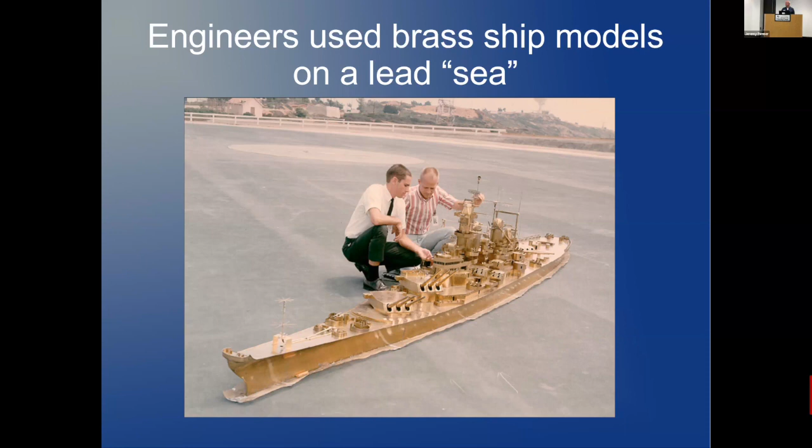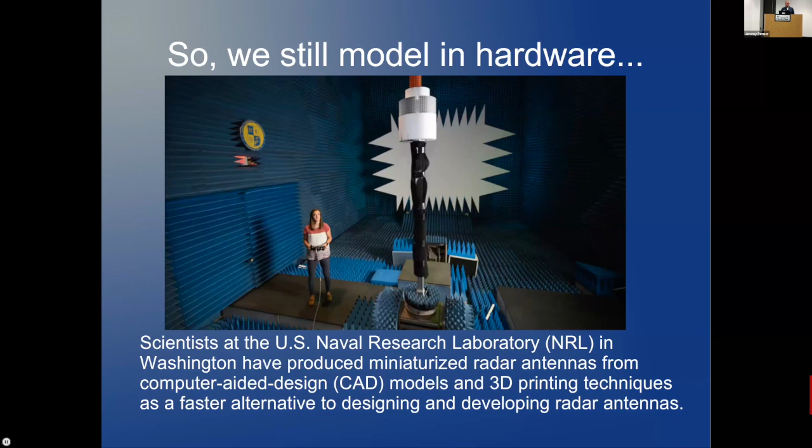Okay, so we're thrifty ham operators, so we don't do that approach. What do we do instead? Well, one thing I want to point you to is software. We're not going to model antennas in hardware, we're going to do it in a software antenna model. And we're going to use one of the available packages. This one is called MMANA-GAL.

Right off the top, let's get that silly name out of the way. Why is it called MMANA-GAL? Well, AN is for antenna, and the second A is for analyzer—so MM-antenna-analyzer. The first MM refers to Makoto Mori, who is Juliet Echo 3 Hotel Tango. He's a ham, and as you'll see, all of these people are hams—so it was an implementation by amateur operators. The G from GAL is for Igor Gontarchenko, DL2KQ—I believe that's German. And the AL is for Alex Schevelev, DL1PBD. Again, three hams got together and came up with this MMANA-GAL software.

The one I'm going to show you today is freely available, so you can download it without spending a nickel. If you want to contribute to the programming effort of these folks, you can get the MMANA-GAL Pro version for $99, and you'll be at peace with the universe. Or you can use EZNEC Pro 7—used to be quite a few dollars, now it's free. If you find EZNEC useful, please by all means go ahead with it. I found that MMANA-GAL was just simpler.

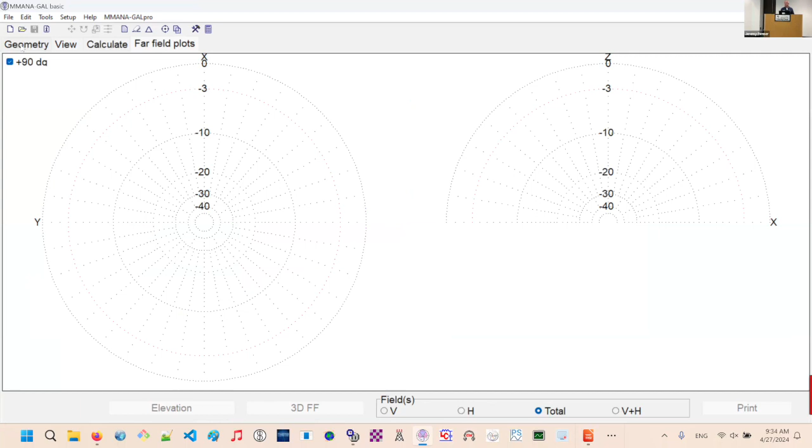Okay, so enough talk, this is MMANA-GAL. When you launch the program, this is the GUI, the graphical user interface that comes up. There are 4 tabs: geometry, view, calculate, and far field plots. You start on the left with geometry.

So we're going to go ahead and call this 20-meter vertical, just to keep our modeling terminology straight. This file or exercise is going to be 20-meter vertical. For frequency, we can select different ones, but let's start with the 20-meter band at 14150 specifically.

First thing you do is highlight X1. This is like an Excel spreadsheet, so you just hit enter and you get X1, Y1, Z1 - the first point with subscript 1. Then you get a second point, X2, Y2, Z2. We're going to put 5.1 meters here, and remember that was the Z displacement. So Z2 is equal to 5.1 meters.

Enter. So, is Y2, Z2 related to R2D2? R2D2 was our cousin, yes indeed. C3PO is the next level. Thank you for that, there's always one in the crowd.

Okay, so we want to use the view tab next to make sure we actually put something right - in other words, that we didn't put something diagonal, which sometimes happens. You can use the shift key and scroll down to move this thing around. Of course it's a very boring design, so there's not much insight to get from this, but this acts as quality control to confirm you're actually modeling a wire going straight up and down. You can hold the mouse and knock yourself out, moving the shape around.

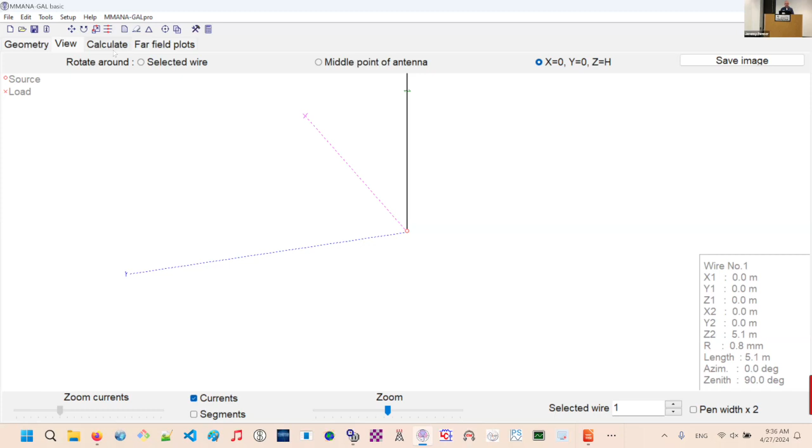So next we go to calculate, we're done with the view. Now we double check that the frequency is 14.15. Next, ground - we need to tell the program what ground we want to use.

Free space? No, that's for the space station - if we're going to put this up in the space station, that's what we use. Perfect ground is if you have a perfectly conducting ground, which, in parentheses, it should be noted that if you're on salt water on Galveston Bay, in the middle of the bay without any metal substructures around you, you might want to model it as perfect. But for here, we're going to go with real. So next we click on ground setup.

Here we have two parameters of interest: dielectric constant and conductivity of the ground. It's defaulting to basic average ground. It's not going to be desert like outside El Paso or San Angelo, very dry, and it's not going to be very conductive like if you're setting this antenna right next to the ocean with salt water.

Height is how high off the ground you want to put that feed. In this case, remember, our approach was to put it on the ground itself. The little red circle is on the ground, so we don't want this displaced off of the ground. We want it at 0.

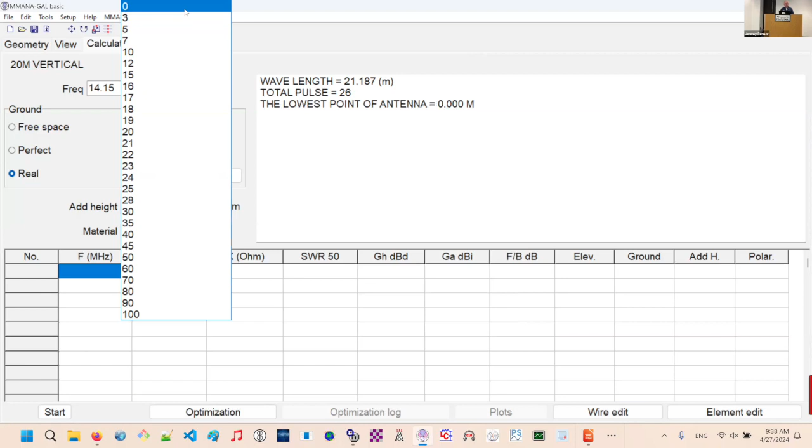Material: what is your antenna made of? You have different choices here. We're going to just select copper wire, a basic copper wire antenna. And that's all we need to tell the program.

As soon as we click start, the program will run, and just be aware this can take a long time since you're asking the computer to solve very complicated differential equations. So we click start, and it's done. The power of computing today—you can design a nuclear bomb with these things. It's amazing, it's that fast, and it just simulated all your equations for you.

So what does this tell me? I'd like to point out two parameters here. The input impedance of my antenna is 35 ohms. We'd like it to be 50 ohms, but 35 is not too bad. And my SWR, assuming a 50 ohm impedance, is 1.45. Not too bad.

So now with that, we go to far field plots, and here you see two plots. Remember from your technician exam, you may have looked at the azimuthal plot, which is a view as if a bird was overflying your antenna. Your antenna is at the origin, x equals 0, y equals 0. The bird flying over sees essentially a big blob down at the bottom. Now on the right-hand side you have the elevation plot.

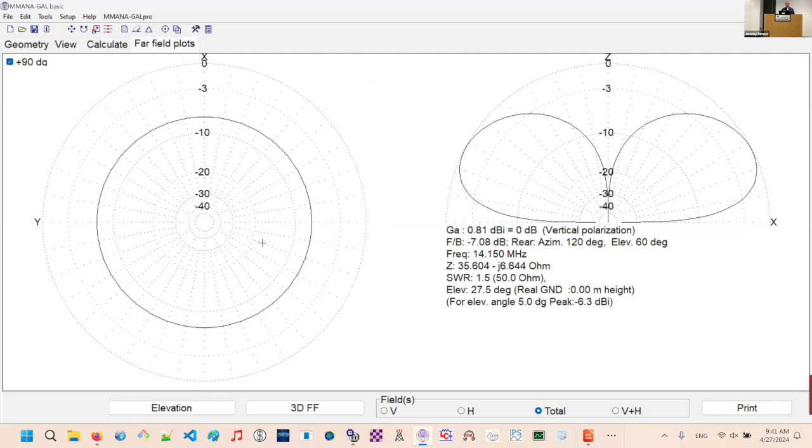So we can click, for example, elevation and say 5 degrees, say okay, and that's the profile at 5 degrees—the gains you'd expect to get at 5 degrees. This would be for your DX right here. So great, that's fine.

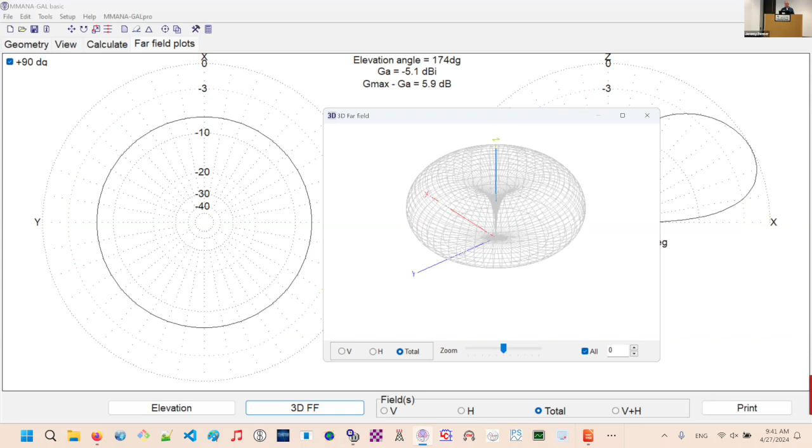But I'm really more of a visual person. Can you model this in 3 dimensions? Well, you can—use this button called 3D far field, and you end up with this donut plot that we'd expect from a vertical antenna. You hold the mouse down and can knock yourself out doing this kind of fun activity all afternoon long. So we'll leave that one alone. And that is the modeling of a vertical antenna.

As simple as that. So we're not going to save it—we're going to move on.

Next, we're going to go to the practical exercise number 2, modeling a 20-meter dipole antenna. Now, a dipole antenna, if you remember, dipole meaning 2, it's going to be extending from your feed point to one side and from your feed point to the other side symmetrically.

And we're going to hoist this device up a certain height. Our exercise here is, again, I point out the ground plane, it's the line with the hash on the very bottom there, and the red line right here is my antenna. It's going to be a displacement in the X direction of 5.1 meters. Why 5.1? Because it's a quarter wave for the 20-meter band that we want to work with. On the other side of your feed point, your red circle, just like before, is going to be another 5.1 meters.

We're going to then take this dipole antenna and displace it in the up and down direction, your delta Z is going to be 10 meters, and that is going to be 32 feet. Something in parentheses we should say, we're talking meters quite a bit here because MMANA-GAL works in meters, so you'll have to convert your measurements to meters.

Let me explain. Let's go back to MMANA-GAL again with this in mind, which is what we're going to model. And we're here, remember our 4 tabs, so we go to geometry, always start on the left. We're going to go ahead and put in, remember what we did, 20-meter dipole, the title of our exercise.

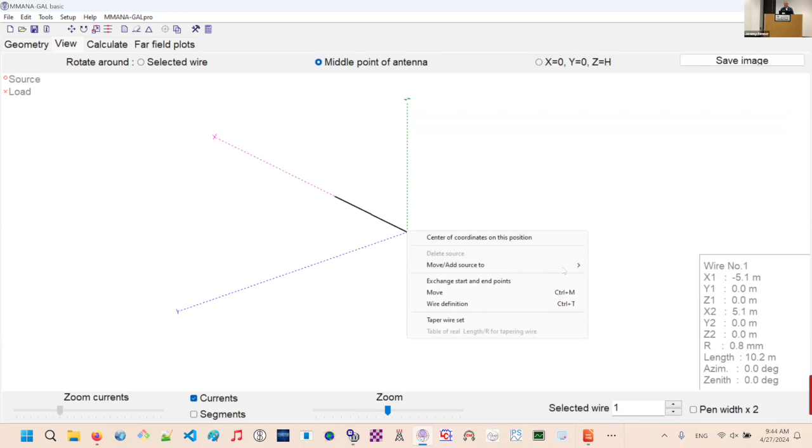Now, as always, we go to view to do the quality control to see if it did what we told it to. It did exactly what we told it, not a very interesting antenna, a piece of wire resting on the ground. We hover in the middle, right click, and just like before, we add a source to the center of the wire. As soon as we click that, we notice that the program has added a little circle, a red circle, which the legend up on the left-hand side says, hey, that's your source.

So your source is in the middle. Something in passing, if we go back to geometry, remember we added something here on the top part, but notice the program has added something down here. That's the driving source that we're telling it to put in, so it's wire 1 center. So we don't have to remember that, we just do it interactively in view.

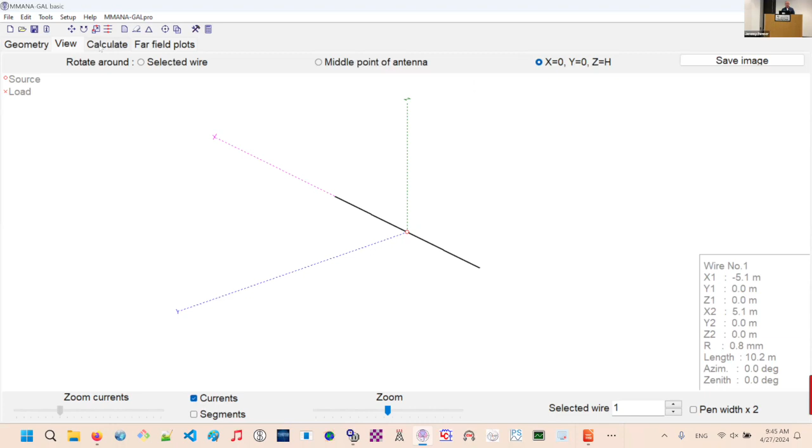So after that, we go to calculate, and again we check out that the frequency is at 14.15, which it is. The ground setup, we unclick radials because we're modeling a dipole, we don't care about radials. We leave everything default, we say okay.

The height. Now, remember in the vertical, we had the vertical feed point on the ground. Here, that's not going to be, we're going to have to have 32.8 feet of height, so that translates to 10 meters, so we'll go ahead and say 10 meters. And for material, we're again going to go with copper wire. So again, that's all we tell the program.

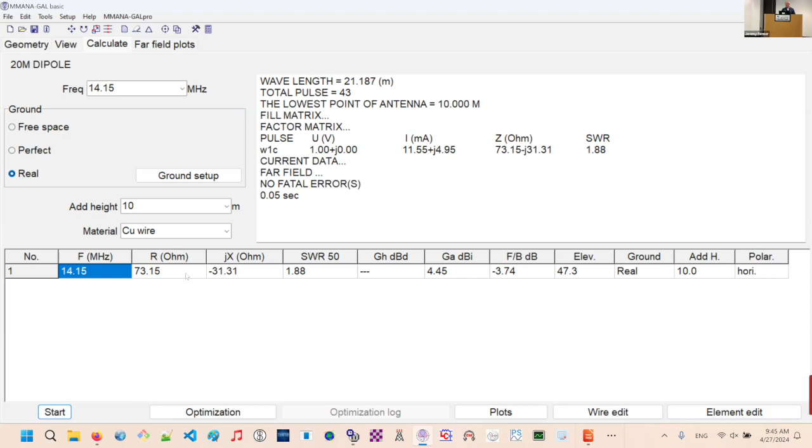Now we tell it to start and we brace for the long calculation, and you're done. So there we are. Now we're getting, again, the 2 parameters that we care about, our input impedance. Ideally, we'd like to have it at 50. It's saying 73, could be worse. Our SWR, 1.88, not too bad. So we'll leave it at that.

And then we go to far field plots. We see now that the donut shape has sort of been squished on the sides there, and that's because this is a dipole antenna, so the dipole is going to have a different radiation pattern. Again, this is the left-hand side, the azimuthal view, it's as if the bird was flying over our antenna. Remember, our antenna was in the minus X and plus X direction along the X-axis.

So along the X-axis, which is up and down in this view, the radiation pattern is going to be squished. Along the Y-axis, it's going to be elongated. So that's a typical dipole radiation pattern, and we get a little bit of this sort of pattern right here.

This is giving us insight about what would work for DX and what would work for what we call cloud burning. Cloud burning refers to when our antenna is aiming directly up into the clouds, hits them, and bounces right close to us. So say we want to contact Beaumont, you want a cloud burn, which goes straight up and straight down. NVIS.

Does anybody know what NVIS stands for? The guy in the blue over there, I'm putting you on the spot. Near vertical... yeah, you can't ask for that. That was not rehearsed and then we nailed it. So, near vertical incidence something.

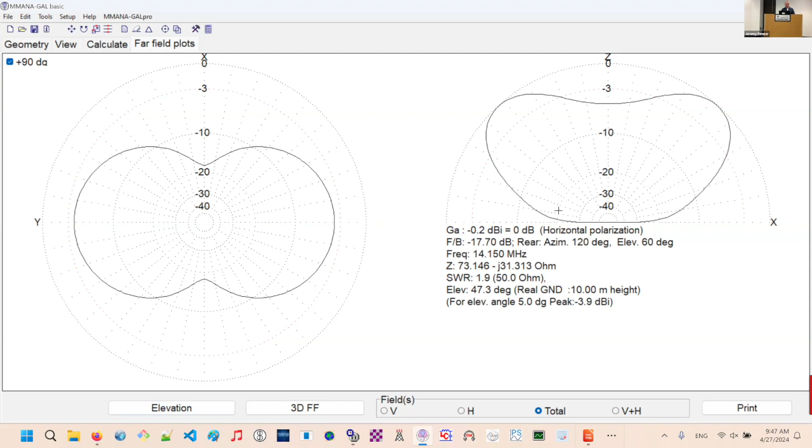Well, the question is, how is it going to work for DX? Remember the 5-degree rule, we put in elevation, 5 degrees, and we get that. So it works, but it's not so great. Now with dipoles, I believe if you go a bit higher in elevation, if you hoist the antenna up higher, you may get a sweet spot and get a better result. But this is what this is.

One last thing before we exit—by the way, with this you've already modeled two antennas because we're done with modeling the dipole. One thing to notice is that the radiation patterns are going to vary depending on which band you're on. If we change the band, and we'll see that in the next antenna, that does happen. So we'll go ahead and close this one.

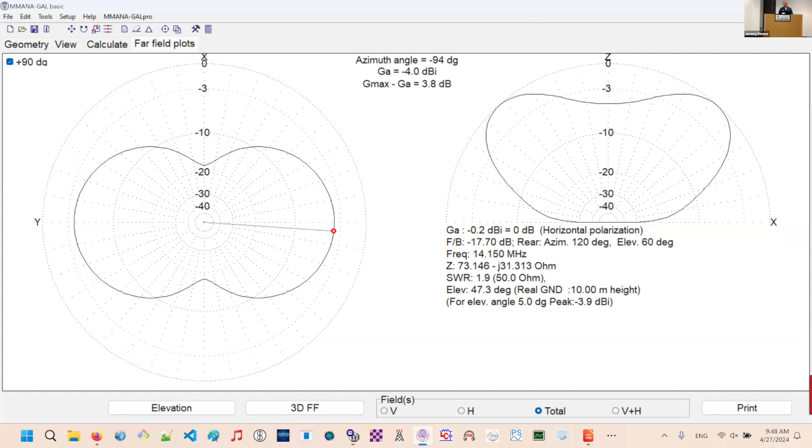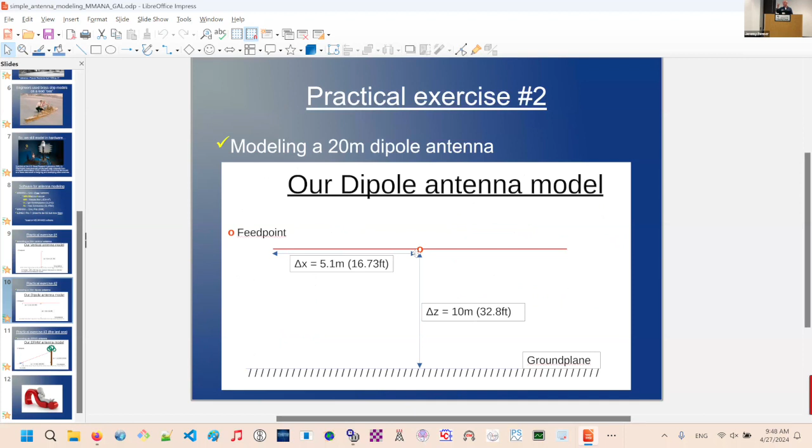Can you show 3D on that one? I just closed it—I'll show you the next one. Sorry about that, it was too quick. But that's a valid question.

Okay, now we're going to go to the advanced exercise. This is the last one, promise. This is going to be an end-fed half-wave antenna. So say for example you're going to Parks on the Air—this is my artistic rendering of a tree in Stephen F. Austin State Park, and you can hoist an antenna up to 30 feet or so. Your end-fed half-wave has a 49-to-1 transformer, that's the little light blue box on the left-hand side. The feed point is the little red circle right at the transformer.

Steve asks, what's this red line sticking out back here? That's what we call the pigtail or the counterpoise of an end-fed half-wave. You'll see online questions about whether a counterpoise for an end-fed half-wave is really needed—hopefully that will be answered in this exercise.

Again, just a note about the diagram here: the hashed line at the very bottom represents your ground. And that again is my artistic rendering of a tree at Stephen F. Austin. So there we go.

So the measurements we're going to have: we're always told that the end-fed half-wave should be about 67 feet long. Remember from algebra 2, the hypotenuse of this right angle triangle is going to be 67 feet long. That's your red line right here—that's your driven element.

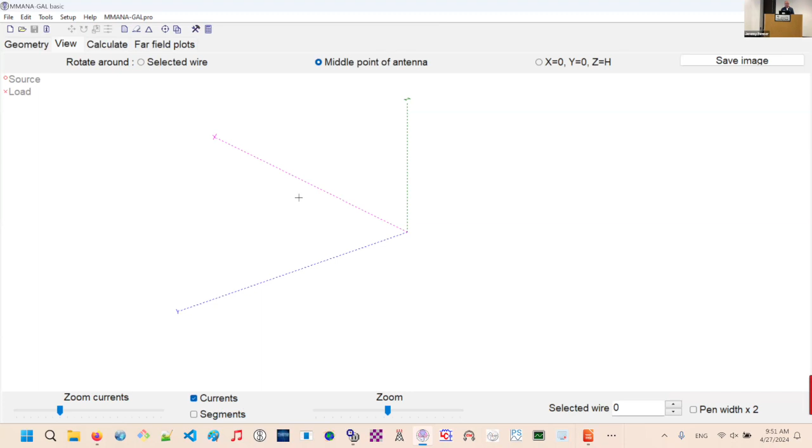Again, remember your four tabs: geometry, view, calculate, far fields. Start in geometry. Name it end-fed half-wave antenna.

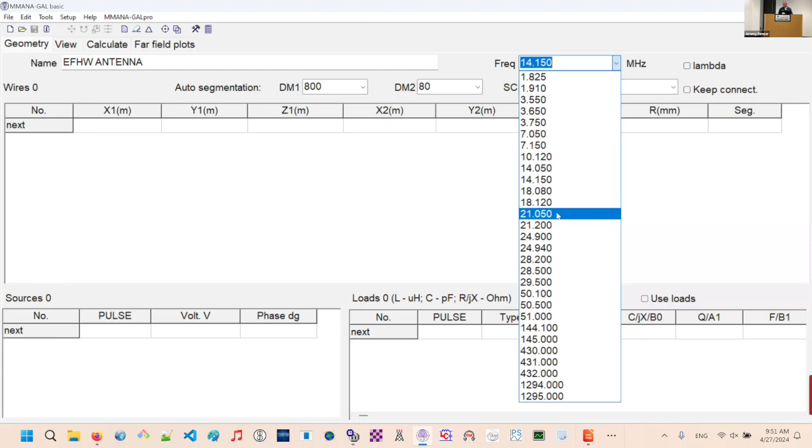We're going to model it for 14150. Matter of fact, where we found that online, it actually said this was going to be for a 15-meter resonant sweet spot. They said this thing is going to resonate in various frequencies, but definitely for 15 meters. So we'll go to 21050. We're going to do the modeling for a CW 15-meter antenna.

As before, hit enter right there. Remember, X1, Y1, Z1, we leave at 0. That's our origin. X2, let's go back to our diagram, was 17.68 meters. If you look at the very bottom there, between the tree and our feed point, 17.68. So we'll go ahead and put in here 17.68 meters. And then for your up and down, up the tree there, 33 feet, which translates to 10.218 meters.

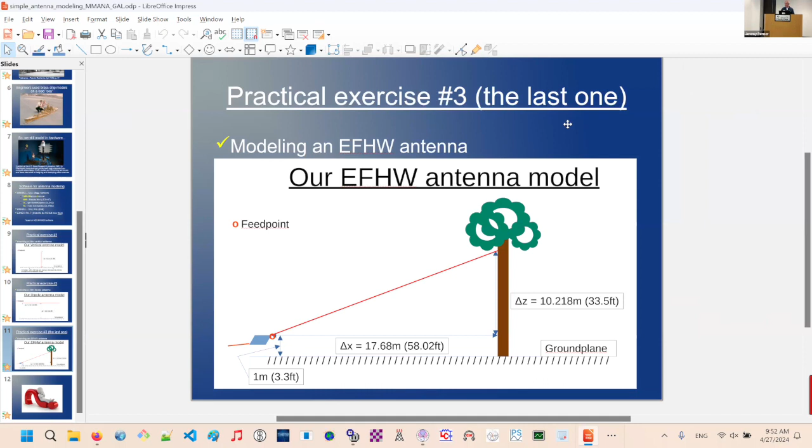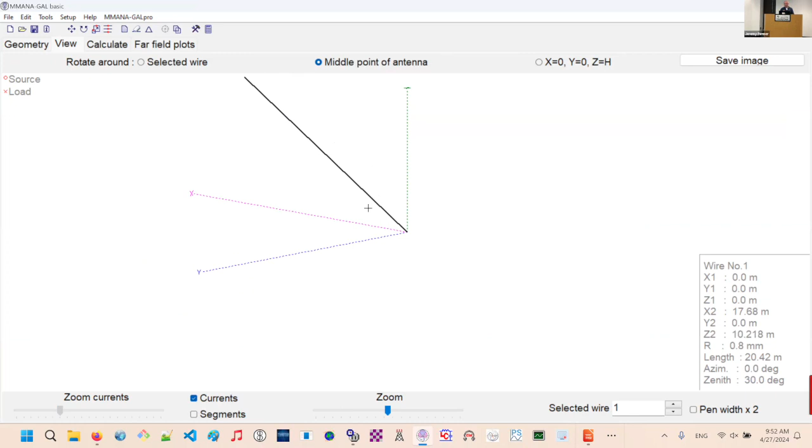Okay, so we'll put in 10.218 meters. Return. Next we go to view, and we see that what we thought we put up, we did put up. It's on the XZ plane back there, just a wire like that. Remember, our driven element, our feed point is going to be right here. So we right click, put our mouse on the very bottom there, and say move or add the source to the beginning of the wire. And again, we see the little red circle down there. That's our feed point. Refer to your legend in the upper left-hand corner. That's your source. Perfect.

Now we go to calculate. We double check the frequency, 21.05, spot on. Real ground, we don't have any radials. We're just going to have a counterpoise or something, maybe. We're trying right now, modeling without a counterpoise. We'll see how that works. So no radials, average ground, height above the ground. We don't want it at 10 meters. We want it the smallest one, 1 meter. So we'll go ahead and change it down to 1 meter.

And the material is going to be this copper wire that Anthony Morone has got for us. It's a green copper wire, 67 feet. He actually did that for our field day exercise last year, and it was a success. Very good results for people that built that antenna. 67 feet of copper wire. Great. So now we say start.

Okay, this is when you start saying, I don't believe in math. This is terrible because my SWR is 27,802. Calm down. What are we telling the computer to do? We're telling it to see an SWR of 50. But remember, we have a 49-to-1 transformer. Now if somebody can take a calculator and multiply 49 times 50 -- anywhere, we can bring a calculator up here -- but if somebody can beat me to it, 49 times 50, what number do you get? 2450.

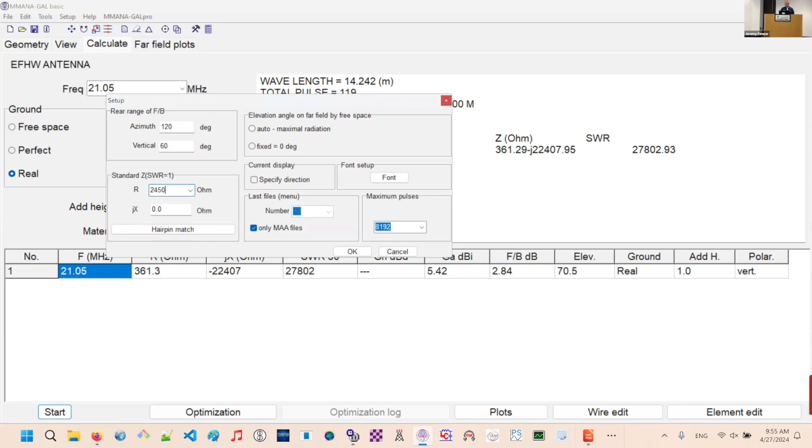Okay, now we're breathing again, but it's still pretty lousy. We went from 27,000 now down to 574, which is 1 to 574. That's not good, right? It's about 10 times. Yeah, it pretty much stinks. So we don't want that, right? So before we go into far field, let's improve our modeling a little bit.

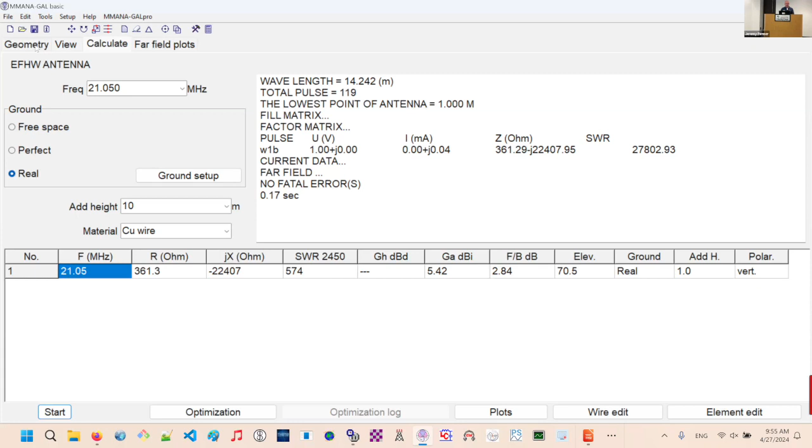So one thing we can do is add that second item we were talking about, that counterpoise. Remember, we're going to have a coax going back to our radio. So that's going to be our counterpoise. Let's go ahead and model that wire. We go to the next line, hit enter, and say the origin is at 0, 0, 0. But X2, remember from here, you've got your 49-to-1 transformer, 67 foot into that tree. This way, you're going to have 10 foot of wire as your counterpoise. So let's call that -3.

Why -3? -3 meaning 3 times 3 is about 9, so yeah, about 10 feet, something like that. So now let's go back to view, see if it did exactly what we told it to. It seems to have done exactly what we told it to. Again, view we use as a quality control of what we just told the program to draw. Click on calculate, and now we say start.

Well, that's a heck of a lot better. So just adding a counterpoise of about 10 feet, this is rule of thumb. I mean, we haven't done any calculations. We came up with this right here.

Okay, 2.92, could be worse. But now I'm going to show you something interesting, and hopefully this is worth the price of admission to this talk. There's this button over here called optimization. Optimization will actually do tweaks to your geometry to go ahead and optimize mathematically the parameters that you want to improve something for your intent.

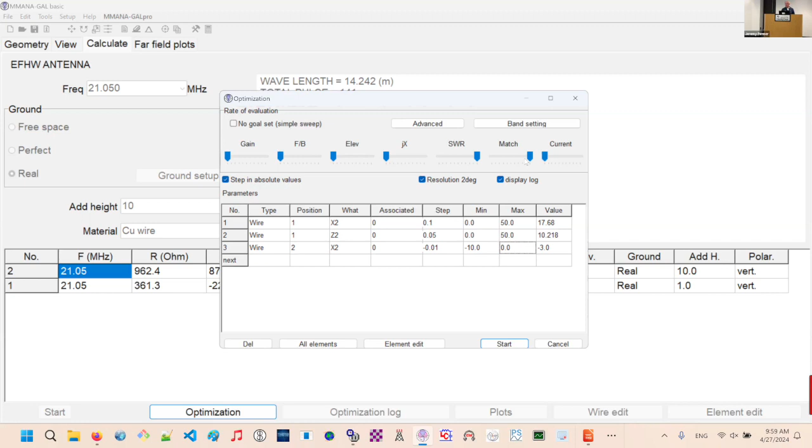So this is the advanced part of the modeling, okay? You're telling it what you can optimize and what do you care to optimize for. You click start, and now the program is actually doing some crunching for it. He's actually changing these values, and he's going ahead and coming up with something.

So he's optimized your antenna and giving you a resistance of 2087. Remember, we wanted that to be 2450. It's a lot closer. And your SWR is now 1.5. Something you can live with.

If you go back to geometry, it's gone ahead and changed your values. Remember, we had 17.68. Now the program is saying, hey, you probably want to have that delta X as 18 meters. And here's delta Z is fine at 10.218. And that counterpoise, you said it was going to be -3 meters. You might want to have it at -4.

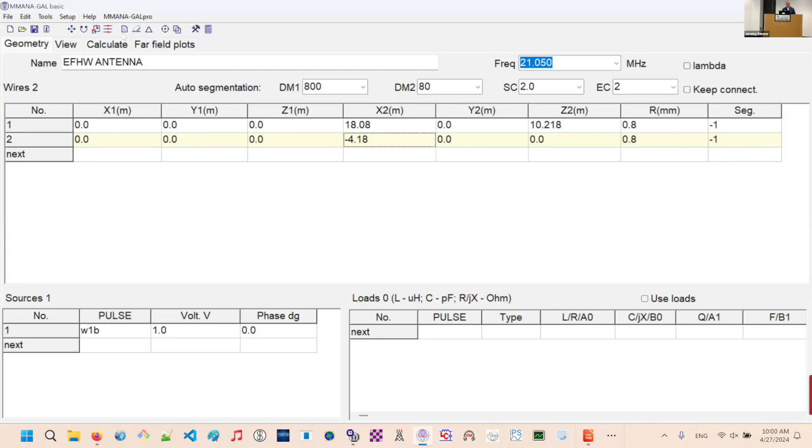So this is the insight that you get from computer model. It's not telling you exactly what to do, but it's telling you, hey, you might want to do this 67 foot a different direction, a different dimension, and also for your counterpoise. You might want to have it longer. So that's what we're getting.

Now you can play this game more and more. You can tell it to optimize or tweak some more values, but we're going to call it at 1.51. So now we say start, because so far we just ran the optimization. By clicking start, you're actually writing it to the database there.

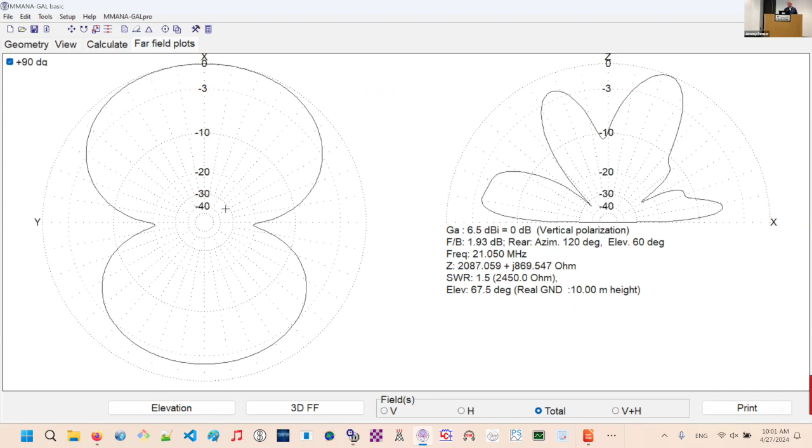And then from there, we go to far field plots. Now we get this. So at this point, it's quite different than what we were seeing before. If we go to 3D far field, you get a bit more of a complicated pattern.

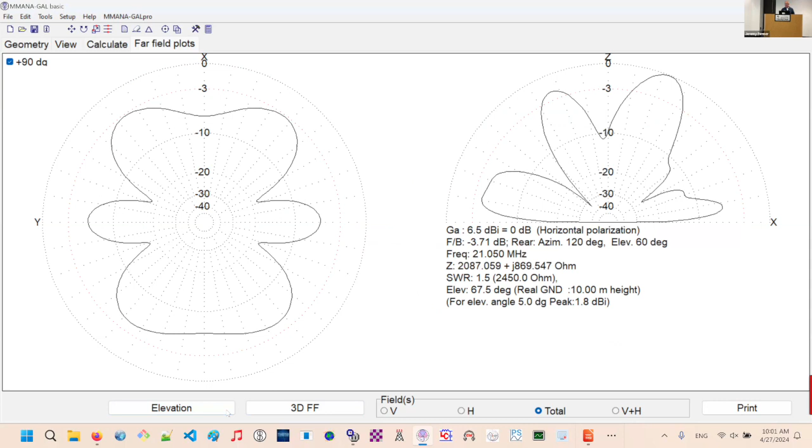At that point, you're seeing that you're going to have DX. Remember the 5-degree rule. So we put elevation at 5 degrees, and at this point I get the most gain, which is quite good. There's a null right there, and another good point right there. The DX over here at 5 degrees is showing it's not bad in that direction. So in this direction here is where I'm finding the best DX. It's telling you which direction gives you the best DX.

Since you're modeling this, did you pick a north direction? At this point we haven't told it - it's all relative to X and Y. So if you want to align your X and Y with northeast or northwest, you can do that. Then you can say, okay, my backyard has this orientation. It's just telling you relative to whatever you define as your X, Y, or Z direction. So at the park, what's your preferred direction?

Anywhere I can throw it up in a tree, because it's ground up. At some points when you're in the field, you can get a compass out and get the radiating element up in a tree. I've got it east and west - mainly east side. There's more amateur radio operators on the east side of the states. You do get some over the mountains in California, but it's pretty fun.

So let's just take a step back and see what we've actually done just now. We've modeled the vertical in 4 steps - 1, 2, 3, 4, hopefully that came across. We've modeled a dipole in 4 steps: geometry, view, calculate, far field. And we've modeled a pretty hairy antenna, pretty difficult, called an end-fed half-wave, in a few steps in which we actually had to use the optimization engine of this program.

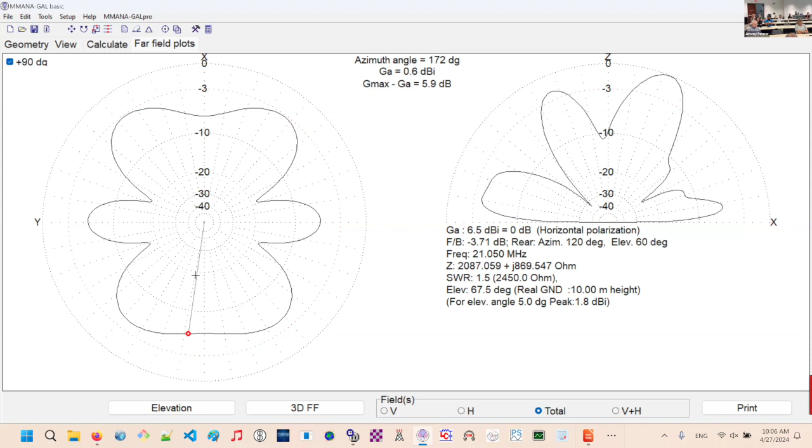I had another question about your grounding situation with the program. If you were able to get the ground parameters, what was that, conductivity and dielectric? Yeah, you're able to input them in there. Will it change the model as well? Absolutely, absolutely, that's a very good question Anthony's bringing.

That was actually the topic of a BVARC newsletter article I wrote two months back, about the effect of salt water. You keep hearing guys say, hey, I went to the beach and I was able to DX all with 5 watts, no problem. Mike, another colleague, said he went to Bolivar near Galveston, and with 5 watts he was able to reach Grenada, close to Trinidad and Tobago, because of the salt water.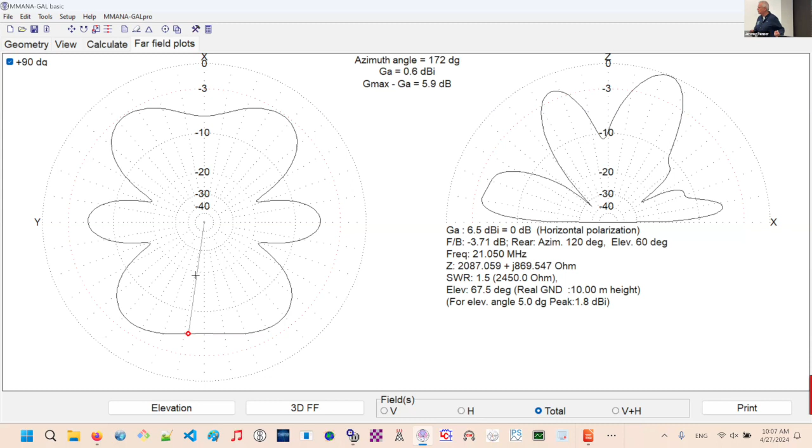So that got me thinking, can we model salt water? Let me show you in this area and calculate. When we went to the ground setup, we didn't delve too much into these two parameters: the dielectric constant and the millisiemens per meter, the conductivity of the ground. If you go into the ARRL antenna book, you'll notice that for salt water, that conductivity goes to 5,000. It's 5 for average ground.

It's about 500 for freshwater. So if you're close to Lake Conroe or up by Huntsville State Park where there's a lake, you can actually model the effect of the freshwater, which is better than average ground. You go to West Texas, you have to drop that number down to 1.0 because the conductivity is pretty lousy in very dry areas. So you can model these things and have a lot of fun giving you insight, proving or disproving, according to theory, what you've heard about.

Is there any advantage to making a dipole for 6 meters or 10 meters rotatable? Yes, there is, because we'd have to go to the model at that particular band, but it is somewhat directional. The dipole is somewhat directional, so essentially the way you orient it does make a difference.

Remember, it sort of looked like an 8, right? So imagine where the 8 goes by the center, that's a null. If you remember from our technician exam, that was the null, so in that direction you're not going to get anything. But you go 90 degrees off, and you're going to have one of the big lobes of that number 8. You're going to be pretty good in that direction and pretty good in the other.

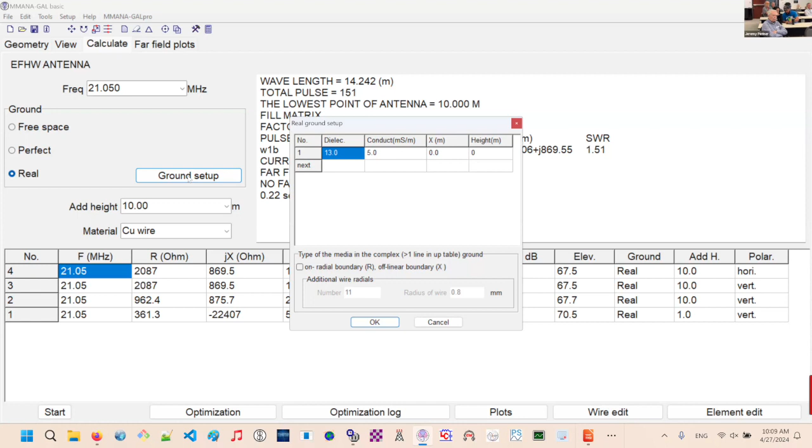Say you move, and over here and over here you're getting, I don't know, Georgia and California. You don't want to talk to the Georgians or Californians, you want to talk to the Northeasterners. Well, if you can rotate or string up your dipole this way, then you could get Tijuana and New York. So the dipole was that directional. It looked like there was a little bit of a node on each side, but not much.

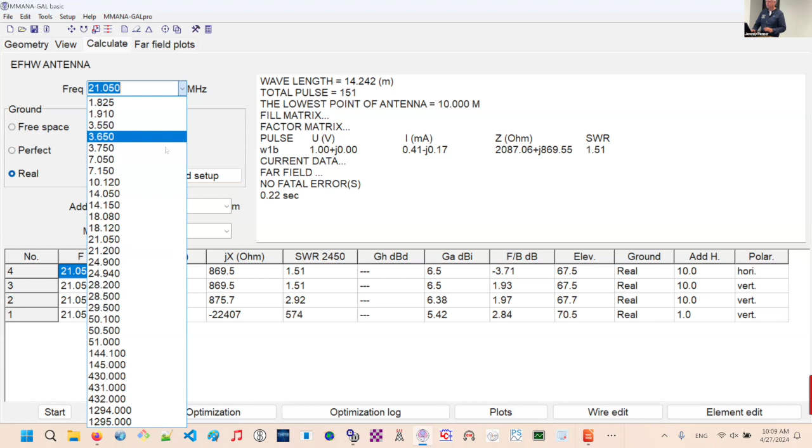One thing to note about these things, let's go over here quick and hopefully I can show you. Say, for example, we just went through the end-fed half-wave, but this is going to have a bearing on that question. If you changed the band, say we go to 20 meters, and we click start, nothing else has changed, nothing up the sleeves.

We click that, 1.12. So this is telling us, according to our model, remember the two parameters we look at after the computation: resistance 2668, we want it to be 2450, so that's pretty darn close for a 49-to-1 transformer. SWR 1.12 doesn't get much better. But if you look at the far field plots, this is a different animal than the one we got before.

So depending on the band that you're in, that dipole is going to have a different radiation profile. Also with dipoles in particular, it depends on how high we hoist the antenna. If you have a dipole that's quite close to the ground, many experienced hands will tell you that'll make a heck of a cloud burner.

Again, that NVIS terminology that we heard. In other words, most of your energy is hitting the ground and going straight up into the clouds, great for having local nets on HF, local being up to Louisiana. But if you go a bit higher, there's a sweet spot, maybe about a wavelength, half a wavelength out. And at that point, you're going to be doing the best DX work for that jump.

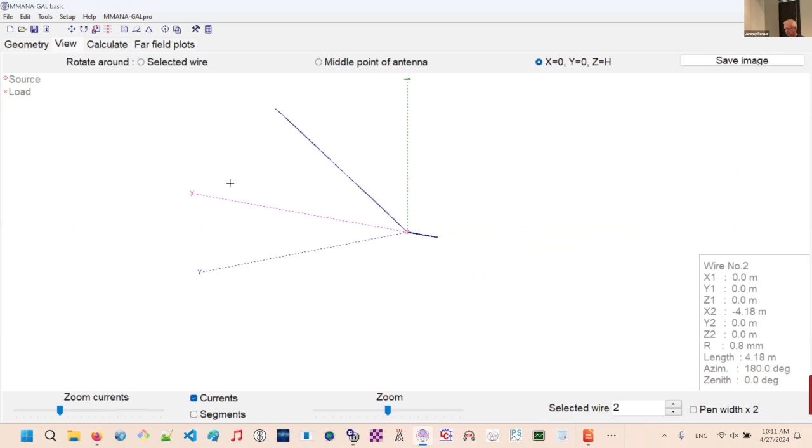To show the directionality, do you mind flipping between the view tab and the far field plot? Yeah, so in this case right here, let me see if I can do this. I don't have a mouse here somewhere. So we're going X plus X and minus X against the XZ plane.

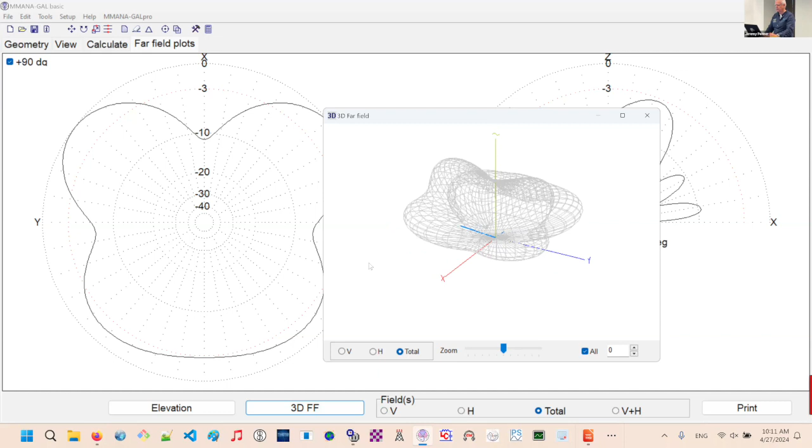So we're right where the antenna is, we seem to have a null. But right on either side of X, we have those two lobes right there. And we have two additional lobes going up into the cloud burning territory.

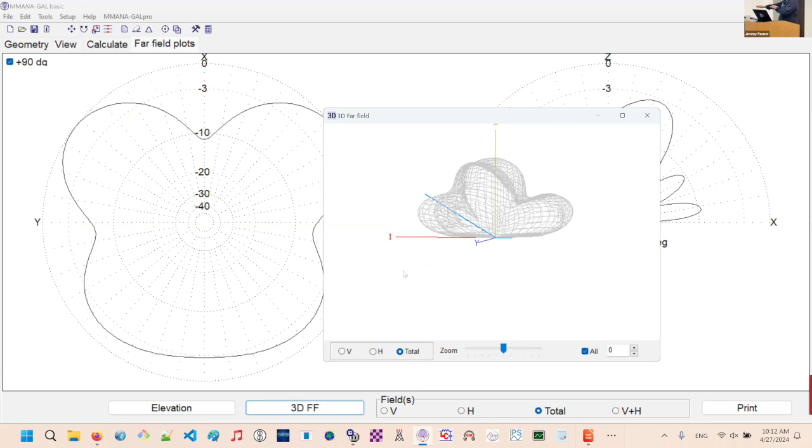Furthermore, another one that I find very interesting is this massive horizontal lobe in the negative X direction. That's the reason I find it interesting, is that it tends to be sort of flattened, close to the ground, which hopefully by the end of this talk you're realizing that's close to 5 degrees, which is DX.

So if you want to go in that long direction, say you've got your 67-foot element here, and you're going to be working in 20 meters, that's from here to that. So that direction is minus X, that's where it's going to be giving possibly good DX. So if you can string it up instead of that tree, you're going to be pointing toward New York, or whatever your objective is.

Dipole, you have it straight across, but normally with dipole, you have it angled deep. Is there a way to model that? Absolutely, absolutely. Remember, we told it where our origin was, and just for simplicity we said plus X and minus X. You could say plus X minus Y, and now you have a slope, and minus X and minus Y, and now you have another slope, a symmetric slope.

Yes sir, does it take into account refraction of the ionosphere? No, it does not, that is up to you. What this is going to tell you is essentially just the radiation pattern.

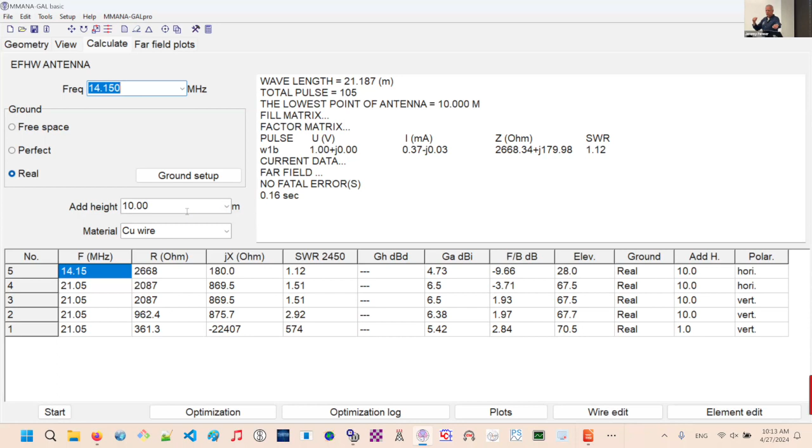Remember that first slide when we showed that US Navy wooden tower that looked like a Photoshop? What those guys were doing, if you think about it, now we're looking over here at these plots, at the far field plots. And by the way, we're saying far field very liberally here, but far field means something very specific in terms of the mathematics, so you have to be far away to a particular length. By the way, there's an article in the BVARC newsletter this month that I wrote about the far field.

So mathematically, where is it, depending on the wave. And at that point, it's going to say, okay, if you had essentially a bubble around this aircraft carrier or battleship you were modeling, that's what the radiation pattern would look like there. Now, what it extends to beyond that is for ionospheric or atmospheric physics, which is related to solar physics, which is another fascinating part of the hobby. So hopefully that wasn't confusing.

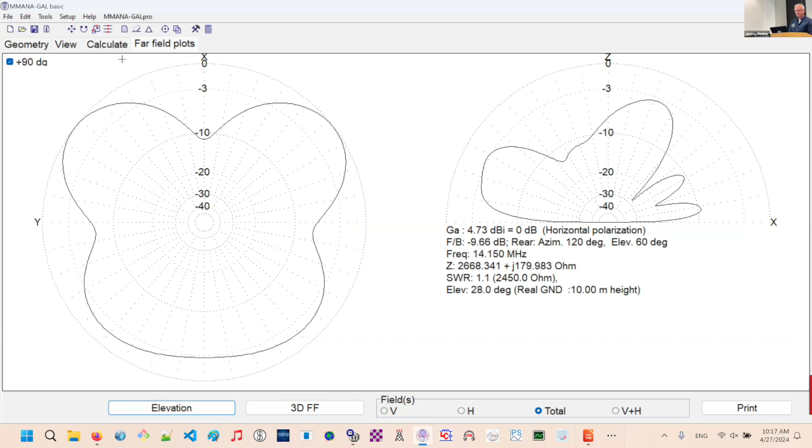I was taking a test. Yes sir, what's the name of the software? The name of the software is MMANA-GAL.

We talked about that one at the beginning there, MMANA-GAL. There's other software too, like EZNEC, which became free not that long ago. They're all using this Numerical Electromagnetics Code or something to that effect, so they're based on the same algorithms.

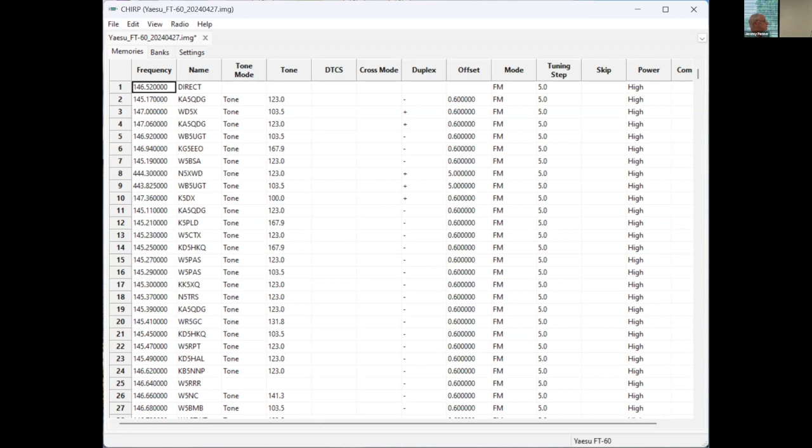So first, every repeater will give you information about itself, but the repeater book and the club have a CSV file ready to be downloaded. The number one frequency on there is Simplex - that's why it's open, so you don't need a key. You can see up on top here it gives us a name for this download, a .img file - so it's an image file of all that information.

So this is the first file that you're going to get from your radio, and you're going to want to save a copy of that. So if something gets screwed up on the loading, you can always go back to the original image file of that radio. Go up to edit or file.

Export. But I wanted to not skip something here. So the first step you're doing is you're pulling down off the radio. Then you're going to save that file, which is the IMG.

But before we break up, I wanted to bring up Field Day, which is in June. I know there's a few of us that want to participate, and I wanted to see if there was any interest from y'all to do a field day activity this summer, in June.

Anybody? Well, we just talking about field day. We have a standing offer to do field day at Red Cross, and we've done this ask. I know there's a few of us that want to, that's a great idea. If y'all want to, if we want to do that, great.

I know a few of us also want to go out and actually go to the field somewhere, set up antennas, radios, and run off of either battery, solar, all that as well. So if y'all are interested in that option, please let me know. If you're interested in the Red Cross or either setup, please let me know so we can get a poll on who's interested in which way y'all want to participate.

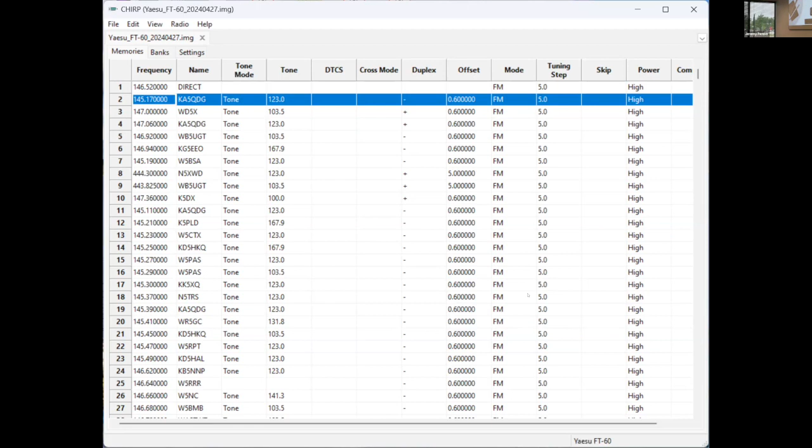So if there's nothing else, yes. Also, we got open positions now for net controls on Tuesday nights. So if anybody is interested in helping out as a net controller, please let Dom know, because I know he helps on that. But most importantly, we need to make sure we have our officers in place for the club moving forward.

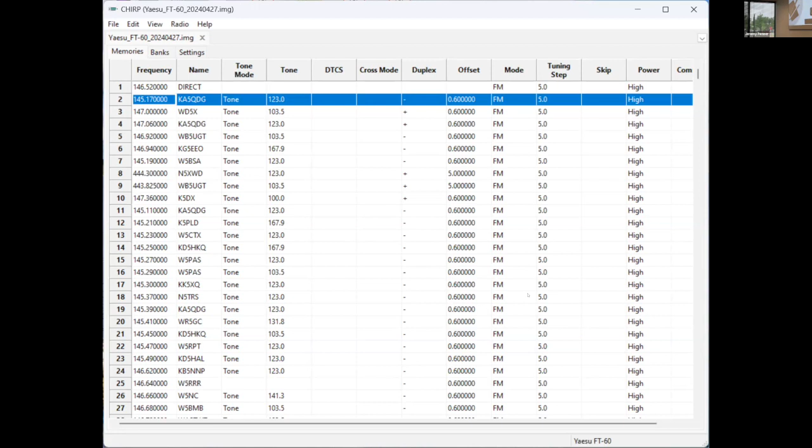So if there's nothing else, I do have something. Yes, so I do have something. Just wanted to say, guys, great job, Jeremy. Excellent. He was thrown in the middle of it. The president stepped away and he just stepped up and did a great job. Thanks.